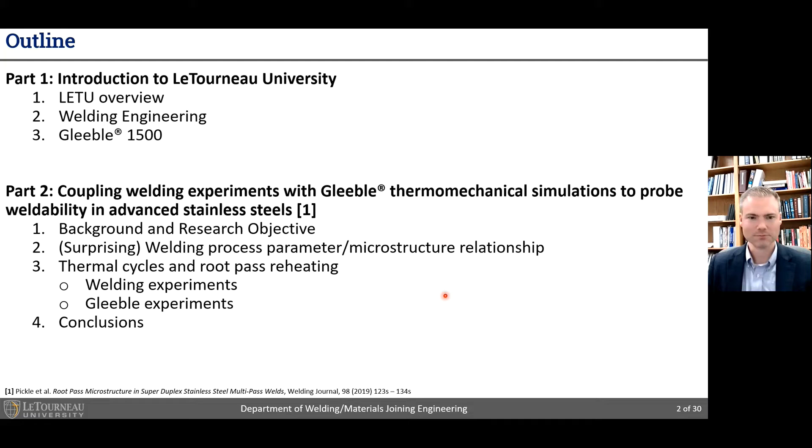First, a quick introduction to LeTourneau University and the Department of Welding and Materials Joining. LeTourneau University was founded in 1946, 75 years ago, initially as a technical institute with a hybrid work-study model.

It was founded by a well-known industrialist, R.G. LeTourneau, who held nearly 300 patents, including things like motor-driven wheels for earth-moving equipment, rubber tires on earth-moving equipment, offshore oil platforms, and many key industrial innovations, including building 70% of the earth-moving equipment utilized in World War II.

Since the beginning, we've grown into a comprehensive university, still based in Longview, Texas, on a beautiful campus, and we're really the premier Christian polytechnic university in the U.S.

What that means is we offer a broad range of programs. We're primarily undergraduate, residential, with flagship programs in engineering and aviation, as well as numerous other degree programs, including nursing, business, full liberal arts, and theology.

We also have graduate residential programs in engineering and active work in mechanical, electrical, and welding engineering, as well as occasionally students in civil and biomedical engineering.

We also offer a wide range of online programs, including undergraduate and graduate programs, such as Master's of Business Administration, counseling, etc. Our campus offers really excellent resources, as you'll see shortly. Here's a snapshot of one of our labs to do this kind of work.

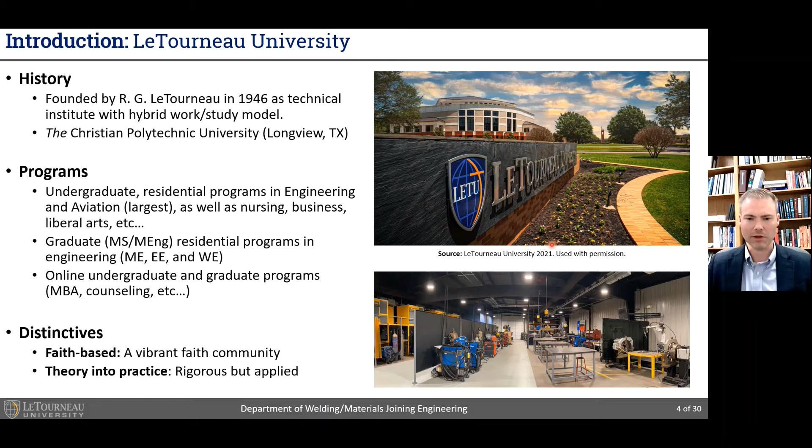The second is that we really believe the best way to learn is to put theory into practice. So we are rigorous in our instruction, but applied in our orientation, and we feel that's the best way to learn.

The Department of Welding and Materials Joining Engineering is housed within the School of Engineering and Engineering Technology, which is home to multiple ABET accredited engineering programs, including mechanical, electrical, biomedical, civil, and a wide range of engineering technology programs.

Within the Bachelor of Science in Engineering and Bachelor of Science in Engineering Technology general degrees, we have options to concentrate in materials joining engineering.

At the graduate level, we offer a Master of Science and a Master of Engineering with a specialization in materials joining engineering. Our department is distinguished by four major things.

The first, of course, is our academics. We are rigorous in our approach to teaching, but also cognizant of the need to put that theory into practice. We align our curriculum to the needs of industry and strive that every student who leaves is ready to make an impact on day one.

Most of our students choose to go directly into industry, but because of the rigorous foundation that they receive, we often have students who have opportunities to pursue master's or PhD additional study at top material science and metallurgy programs throughout the US.

We are focused on the hands-on, and what that means is that teaching and applied research happens in great modern laboratory environments where students really get to see how the principles they're learning in class apply in the real world. This is really enabled by our strong connection to industry.

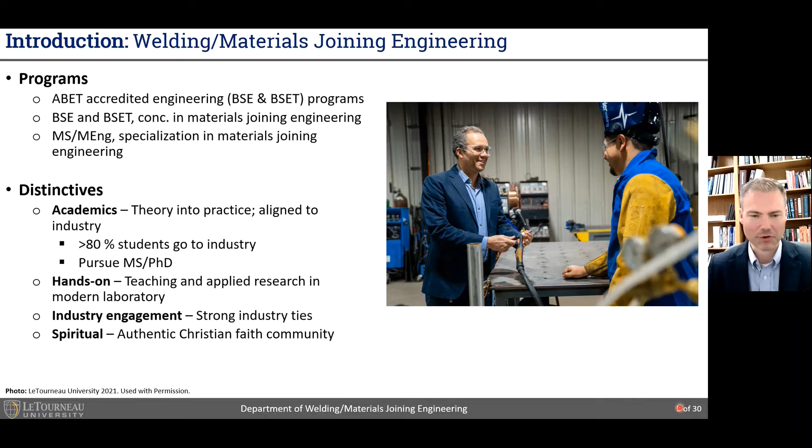So from a content standpoint in welding engineering, we strive to bring together four major things. The first, of course, is engineering. Our students are learning to be engineers, from the freshman engineering design experience through multiple courses to a capstone year-long senior project we call senior design. They're dealing with the design process as well as detailed engineering quantitative analysis, and topics like weld sizing and inspection of weldments.

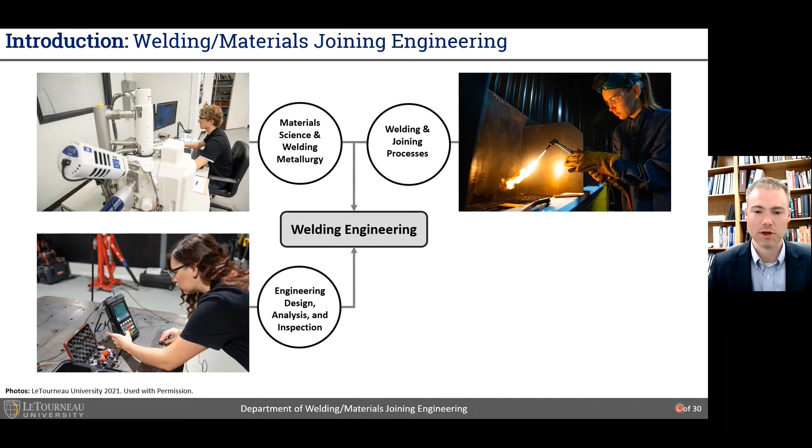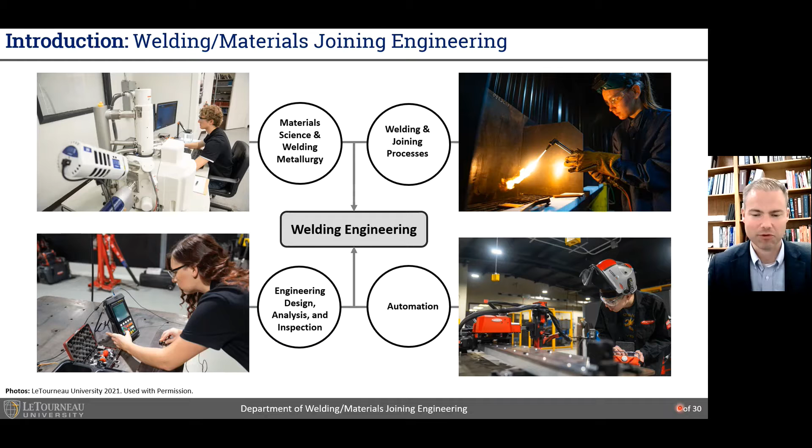We're rooted and grounded in the welding and joining processes, which requires that we understand material science and welding metallurgy so we can know the details of how different materials respond to welding and joining. Finally, automation is just a way of life, so students have the opportunity in our lab to work with that kind of equipment in various classes, as well as elective courses in automation or robotics.

Teaching and research happens in well-equipped laboratory facilities. Over the last 2 years, we've made significant investments, both as an institution and in partnership with multiple partners. We're really grateful to Miller Electric, Fronius, ESAB, and Lincoln Electric, as well as Trinity Rail, who have all helped equip a new welding science lab.

This welding science lab is home to industrial grade equipment, all the major arc welding processes such as submerged arc welding, gas metal arc and flux core, gas tungsten arc welding, as well as robotic and mechanized welding equipment.

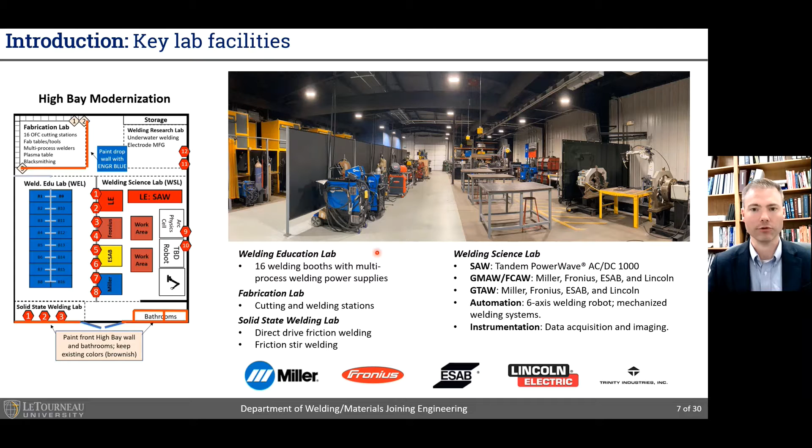We also have excellent welding education facilities. We have 16 welding booths equipped with current state-of-the-art multi-process welding power supplies, and additional space for fabrication. Finally, we have solid state welding capabilities, including direct drive friction welding and friction stir welding.

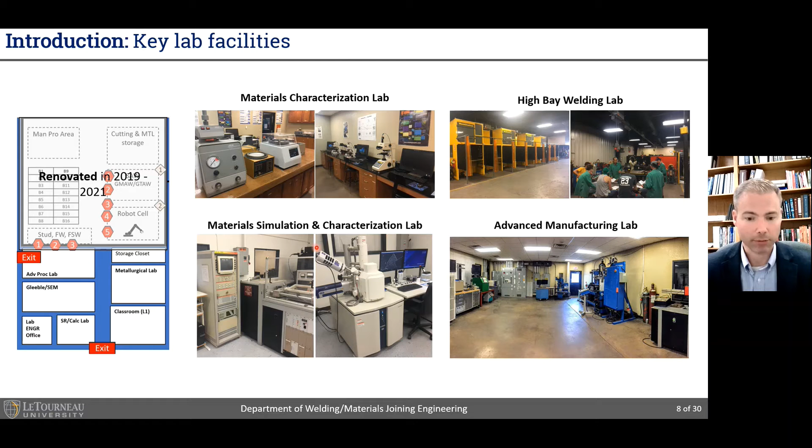In addition to our welding high bay, we also have great materials characterization facilities: standard optical microscopy and microhardness testing, sample preparation, as well as mechanized gas tungsten arc welding equipment, which was used for the work I'll be reporting later this morning. And then finally, a materials simulation and characterization lab, home to a new scanning electron tungsten filament microscope with EDS and EBSD, as well as a Gleeble 1500, which was utilized in the research we'll be talking about today.

Our Gleeble 1500 has been in the labs for nearly 20 years. It's been upgraded as we know how to make it, with digital control for thermal and mechanical systems. We have some accessories, including a C-gauge dilatometer and an older quench system. The primary types of studies we perform, in the last 4 to 5 years, include things like metallurgical phase transformation characterization.

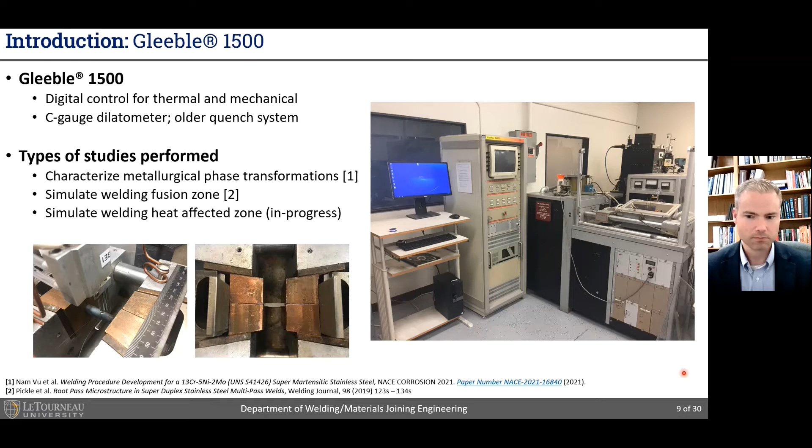So we endeavor to keep it in calibration so it's available and ready for research. It's a great tool, and we're glad that we have it. With that, let's move on to the technical part of the talk today. Our focus is on describing the coupling of welding experiments with these Gleeble thermomechanical simulations.

We're going to be speaking specifically about duplex stainless steels, so I'd like to give a little context before we dive in. Duplex stainless steels are a mixture of austenite and ferrite; here is a representative micrograph of as-received base material showing this rolled microstructure. In this case, the austenite is the lighter etched phase. It has excellent corrosion resistance and toughness, high yield strength depending on the specific grade, and service temperatures from -40 to roughly 280 C as the upper limit. The corrosion resistance is the prime benefit over, for example, austenitic stainless steels.

These materials have greatly improved chloride corrosion resistance, finding applications in places like offshore, petrochemical piping, pulp and paper. Two common alloys are indicated in this table - these are iron, chrome, nickel systems with a notable intentional addition of nitrogen. Nickel is an austenite stabilizer, and nitrogen is also intentionally added as it stabilizes austenite too. The 2205 grade has 65 KSI minimum yield, with representative compositions shown here. The so-called super duplex 2507 goes to higher yield strength as well as improved corrosion resistance due to the additional degree of chromium, nickel, and moly, as well as nitrogen.

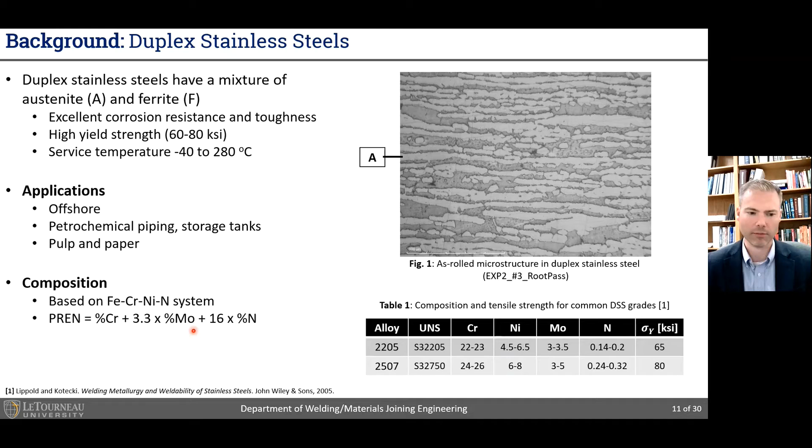Conventionally, these materials are ranked by their pitting resistance equivalent number, and so-called super duplex stainless steels have a PREN over 40. Now digging into the physical metallurgy in a little bit more detail.

All duplex stainless steels solidify from the liquid as ferrite, and upon further cooling, this fully ferritic microstructure will enter a two-phase regime where austenite begins to nucleate from ferrite grain boundaries, and in some cases may form Widmanstätten or side plate morphologies.

This is an example of a cast type structure reported by Gennari et al., from a laser weld fusion zone. Depending upon the cooling rates, fast cooling will tend to suppress the nucleation and growth of austenite, resulting in a ferrite-rich microstructure, such as one sees here. In this case, the austenite etches light.

So the cooling rate has a big effect on the austenite volume fraction. Slow cooling, if between 475 and 850 C - and what constitutes slow depends upon the specific composition - may promote the formation of brittle intermetallics such as sigma phase. So the time-temperature history of these materials is quite important for microstructure control and property control.

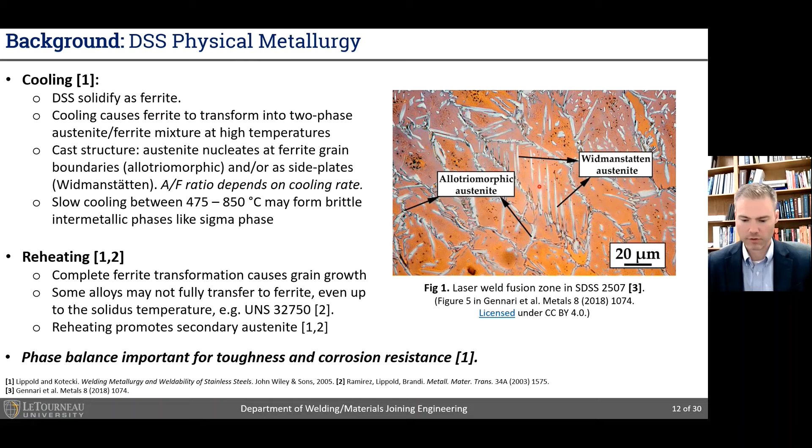It's also known, as reported by Lippold and Kotecki, Ramirez et al., that reheating can promote secondary austenite formation, called secondary because it's forming under reheating. Bottom line is that controlling phase balance - our typical target being 35 to 60% ferrite - is really important to achieve our desired toughness and corrosion resistance for these materials.

So if we think about weldability, in a typical wrought or rolled type plate, we would see this sort of microstructure with a balanced ferrite and austenite phase. Our target and ideal properties would be, in this case, 50% austenite, 50% ferrite.

Now, the welding process variables must all be engineered to achieve this 35 to 60% ferrite in the fusion zone and the heat affected zone. Of course, this will depend in great detail upon the composition of the material, which drives the kinetics of the phases that form, and the welding process conditions, such as heat input, that control the cooling rates. All these details must be considered in order to achieve the target microstructures.

Thermal history is known to be important, as I've mentioned, regarding the potential to drive secondary austenite formation. Looking at a representative micrograph from our work, you can see that at this boundary between the fusion zone, heat affected zone, and base metal, we see profound changes in the microstructure. The base metal is distinguished by this wrought, rolled type microstructure.

In this particular alloy, the 2507, because of the suppression of complete transformation to ferrite, the heat affected zone actually tends to be quite narrow, which is beneficial. And then you can see the presence of austenite, which etches in the lighter phase here in the fusion zone.

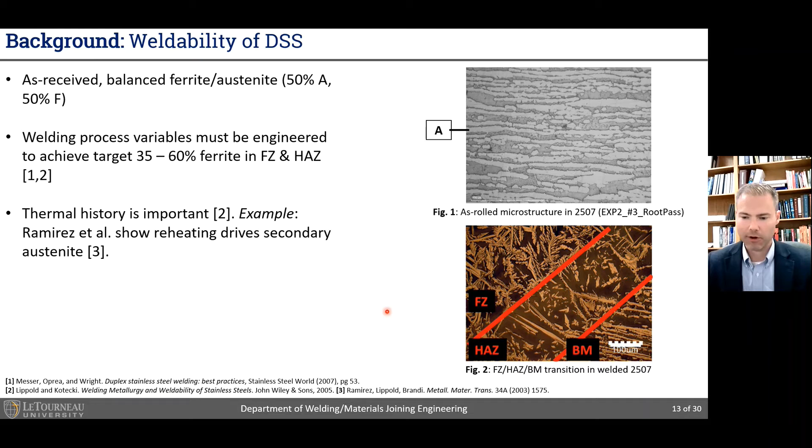So with this as a background, let me state what we were trying to do in this work. We had two major research objectives. The first was a kind of exploratory study where we were looking at correlating heat input of multi-pass welds to microstructure, and in so doing, we got some unexpected results.

That drove the second phase of the work, where we tried to test some hypothesized mechanisms. We found that thermomechanical simulations, coupled with welding, were really key and helpful in driving or identifying the key drivers and isolating those.

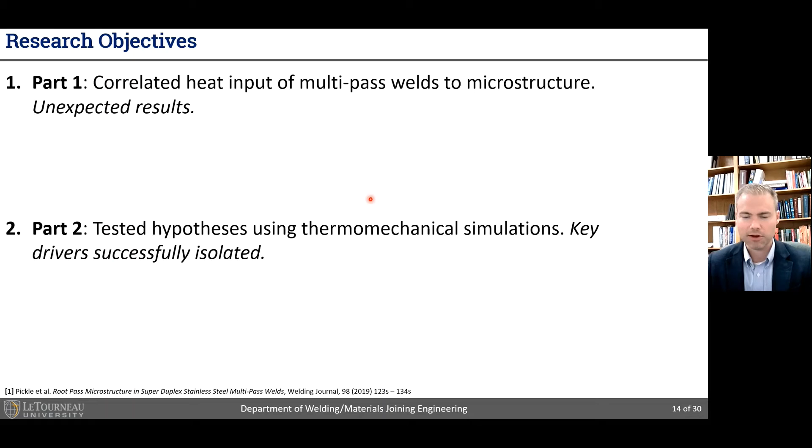So let's begin. In the first experiment, we used a standard 94% argon, 6% nitrogen shielding gas, conventional arc parameters, using a mechanized gas tungsten arc welding process and a 75-degree included angle joint design, as indicated here in the picture. We designed these welds to run in three major ways: a high heat input weld with 2 passes, then a mid-range 4-pass weld, and then a low heat input 6-pass weld. Our goal was to understand how the microstructure varied with process parameters.

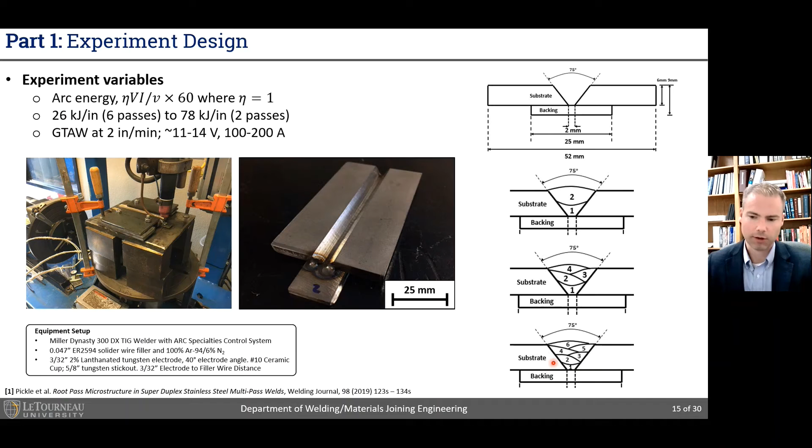We focused in particular on the root pass under the idea that this would likely be the location that might be in contact with a corrosive media. And what we found was a somewhat unexpected result.

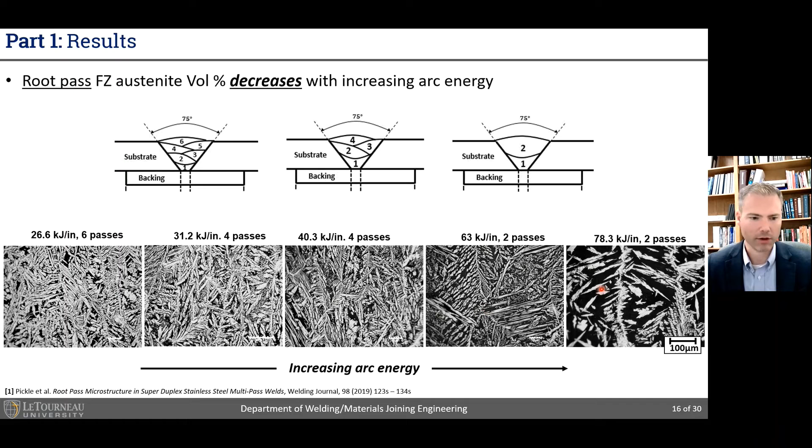In our first findings, we looked at the microstructures for increasing arc energy, and what we saw was opposite of what we expected. From the literature, we expect that high heat input will result in slow cooling rates, which ought to result in higher austenite contents. But we found exactly the opposite, and this was the starting point for the rest of the study, to try to understand why we see so much more austenite in the root of the pass. We plotted the percent austenite as a function of arc energy.

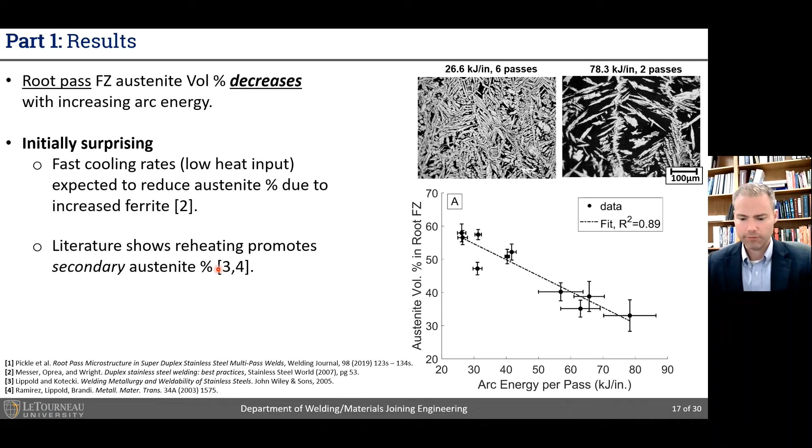We found almost a linear decrease, and we know from the literature, as I've already alluded to, that reheating is a prime driver for causing secondary austenite to form. This led us to hypothesize that perhaps that was the driver. When we looked at this in terms of the number of welding passes, it began to fit within this prior known work. You can see that as the number of welding passes increases, we see this increase in the percent of austenite in the root of the pass.

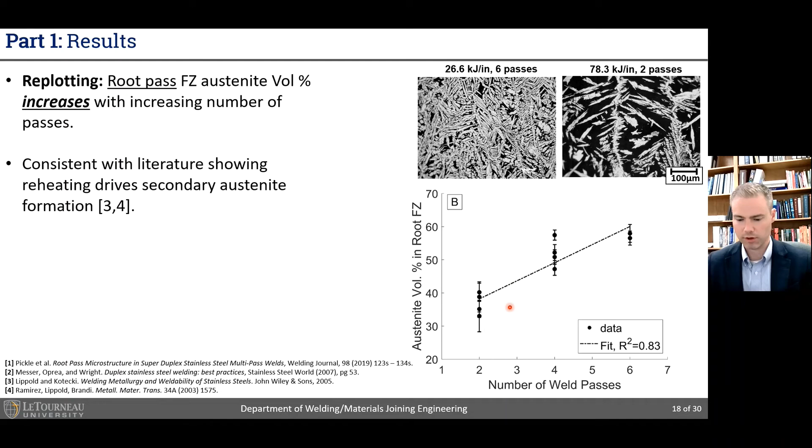So zooming in and looking at one of these 6-pass welds that have the higher austenite content, we can see these small and very prevalent amounts of intergranular secondary austenite formation. This led us to make the following hypothesis: that a higher number of passes are resulting in thermal reheating of the fusion zone root pass, which is causing the secondary austenite growth and overall increase of austenite volume fraction.

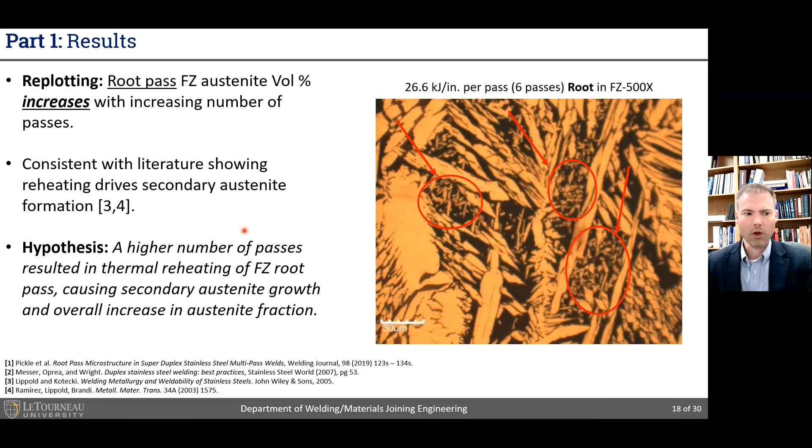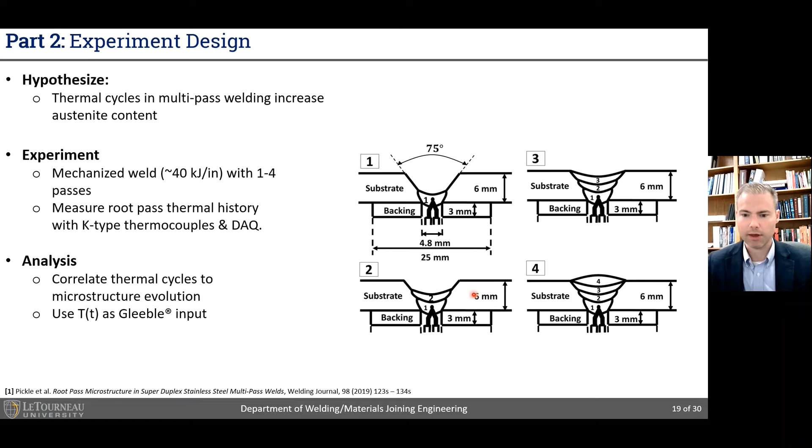So to test this hypothesis, we wanted to really dig into it, and we designed the following set of experiments. We performed a root pass and then embedded a thermocouple up through the backside. We then welded that, measured the in situ temperature response in the root pass, sectioned the weld, examined the microstructure, followed by a third pass where we did the same, and then finally a fourth pass. This allowed us to begin to directly correlate time temperature profile, peak temperatures, and the actual austenite volume fraction in the root pass. Here's what we found.

Here is our starting root pass microstructure. Using image analysis, binary thresholding, and segmentation, we find nominally 43.5% austenite, as you can see here.

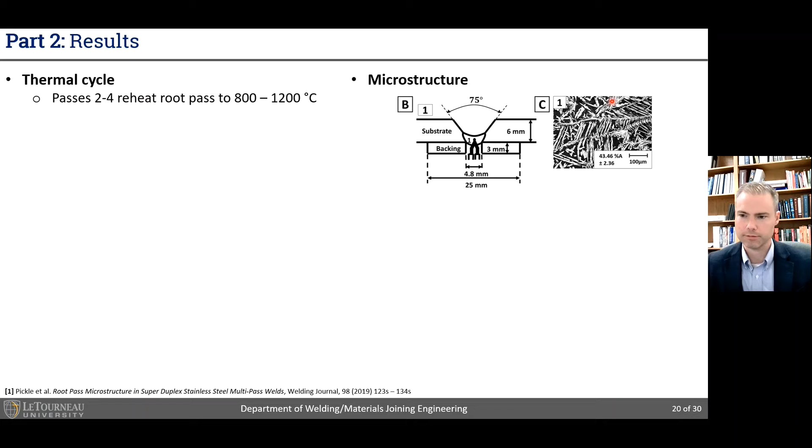As we add the next pass, you can see the thermal cycle here. We find a peak temperature of roughly 1200 degrees C, and we can see that the austenite volume fraction increases. We've now terminated the experiment, sectioned this weld, and we're measuring the austenite volume fraction here. Continuing the experiment, we do the same thing and find the austenite volume fraction increases again. Finally, we do the final pass and find that within the uncertainty, it's about the same, or perhaps it's decreased just a little bit.

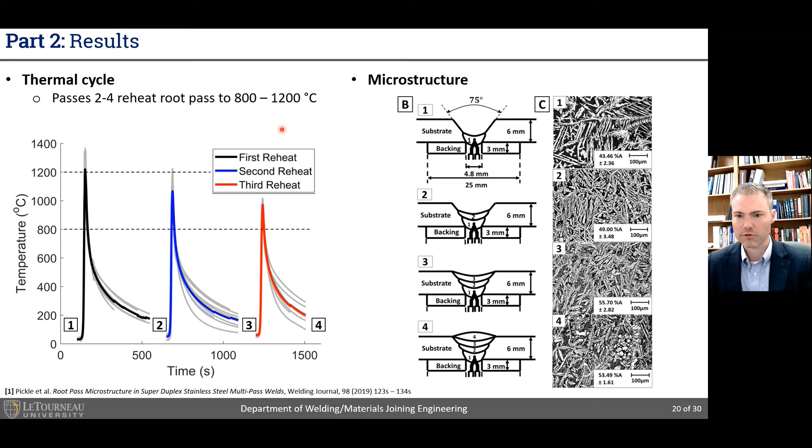All of these passes have peak temperatures between 800 and 1200 degrees C, which is the range known to drive secondary austenite formation. So this all seems quite telling. As we look at plotting the austenite fraction as a function of the number of passes, you can see that it's maximized with the third pass before dropping slightly in the fourth pass.

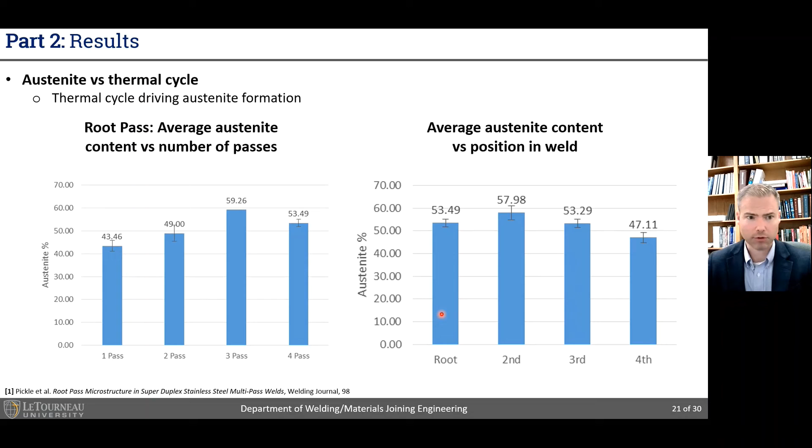So to understand the role that composition could play, we wanted to isolate the role of nitrogen stabilizing in these argon shielding gases. My students came up with the clever idea that we would make multiple bead-on-plate welds in 1/8 inch thick plate. This is a single pass that penetrates all the way through the plate, but then we vary and control the shielding gas content, and use these for subsequent in situ reheating using the measured thermal response we obtained in situ from the weld. Now we can directly probe the degree to which composition is a factor, as measured through the surrogate nitrogen content in these shielding gases, as opposed to thermal cycle.

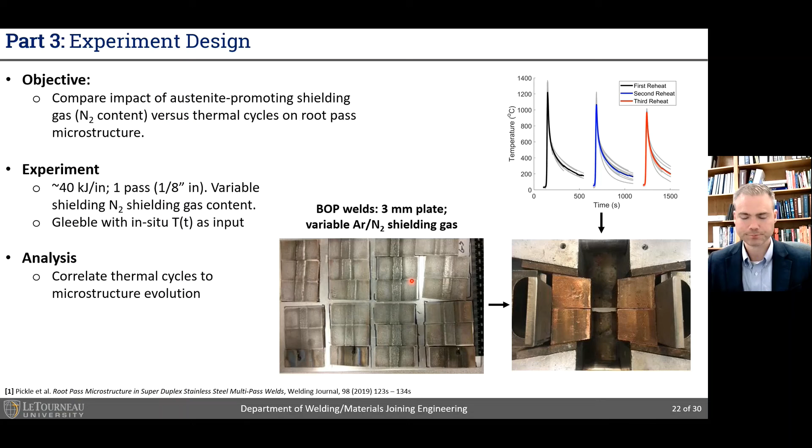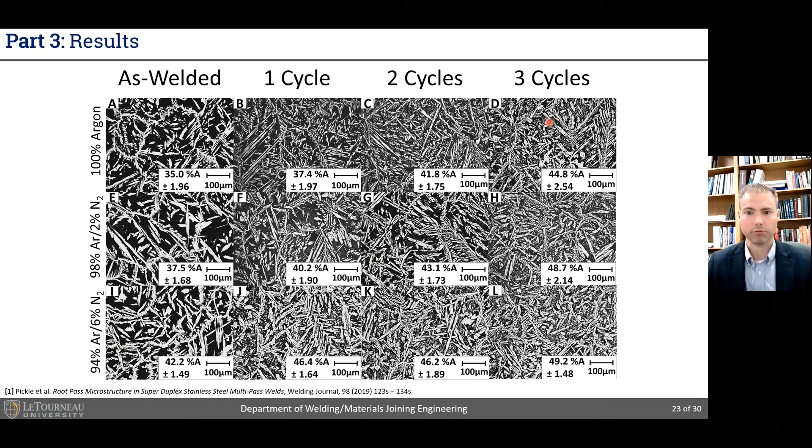So here's the results. They performed all of those series of experiments with these 3 different levels of shielding gas. In case 1, 100% argon, you can see that we have a lower amount of austenite in the root, while as we increase our nitrogen shielding, we increase our starting austenite content. Now, as we apply the same thermal cycle, you can see in all cases we begin to grow the secondary austenite, which continuously increases with the application of the 3 thermal cycles that were directly measured from the weld.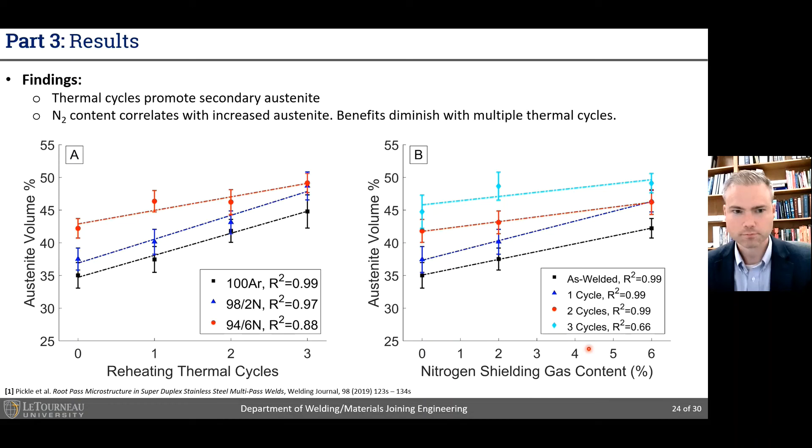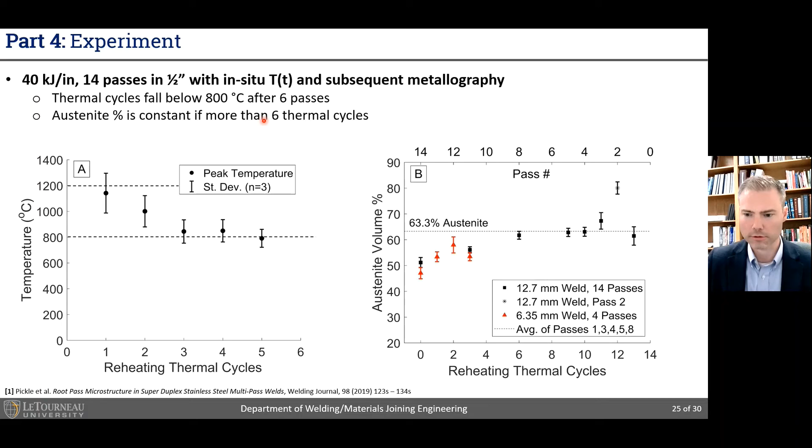Just for comparison, I plotted here the results from our 4-pass weld, and you can see we're getting good and decent agreement. So what we see is that these reheating thermal cycles really do appear to correlate, driven by this peak temperature. Total time above 800°C is critical, well in line with the older literature, such as Ramirez et al., and you can see the results all fit together.

So just to wrap it up today, clearly the key takeaway is that heat input is really important for microstructure control. However, just thinking solely in terms of heat input, if you're doing multiple passes, we need to think about the impact of these reheating cycles. This is all consistent with previous reports.

If you really want to dig into the details of the mechanisms of secondary austenite growth, this has been well explored by Ramirez and colleagues in previous work. And finally, in line with industry practice, clearly the 2% nitrogen shielding gas is acceptable.

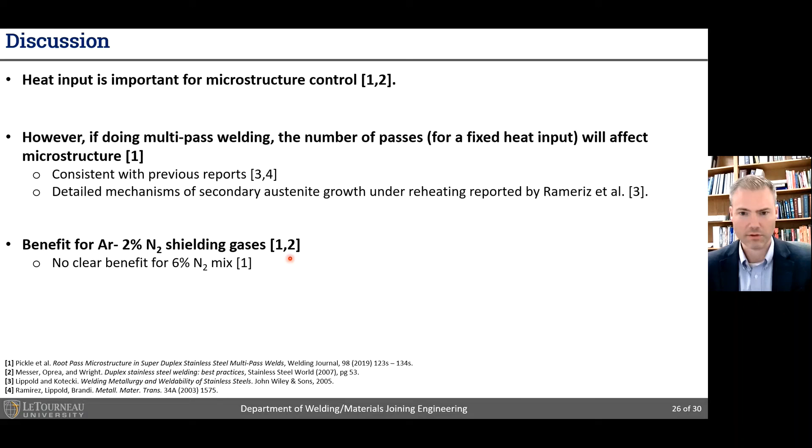So to finally conclude, the initially surprising welding results, when we dug through all the details, were consistent with previously reported mechanisms. It's clear that reheating is driving the secondary austenite volume increase due to the formation of intragranular secondary austenite. Total time spent in this critical 800 to 1200°C temperature range is important for increasing the austenite content.

We really do need to bring all of these factors together: chemical composition through nitrogen gas additions, over-alloyed nickel filler wires, arc energy, and of course these thermal cycles, to really understand how microstructure evolves.

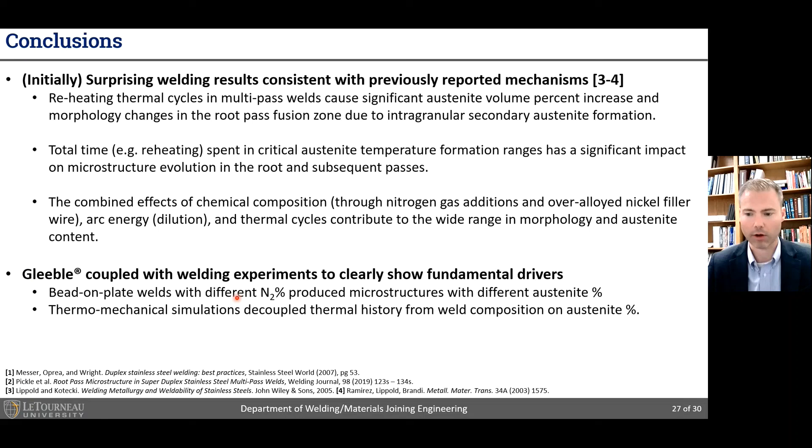And finally, we showed that using the Gleeble, we were able to couple not just Gleeble for base metal evolution, but to actually bring in these welding bead-on-plate experiments to directly probe how both composition in the form of the nitrogen shielding gas content and the thermal history drove the subsequent austenite volume percentage.

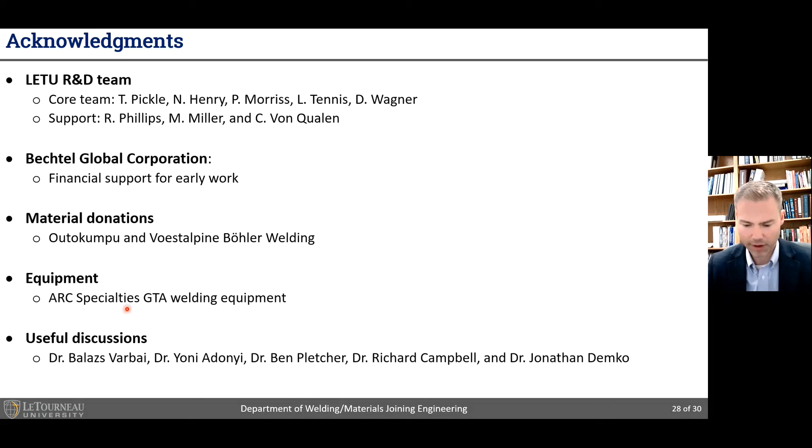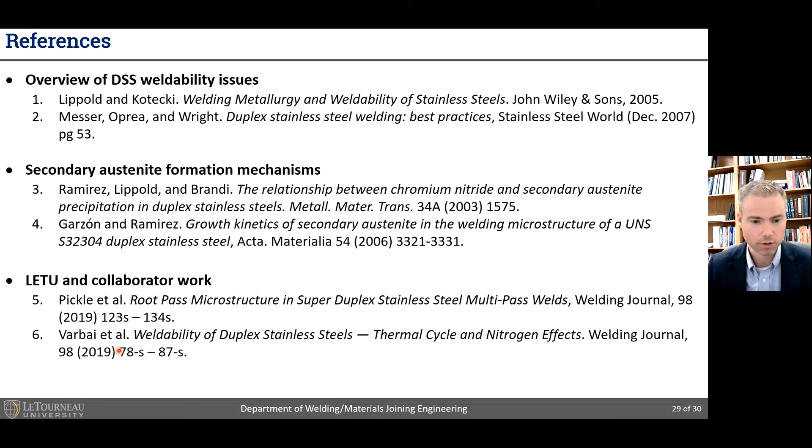And then finally, if you want to read more of our own work, I'll direct you to these 2 papers in the Welding Journal. The work I've described today is really focused in this paper here, and collaborators have done more work probing nitrogen and its role, so I refer you to that work as well.